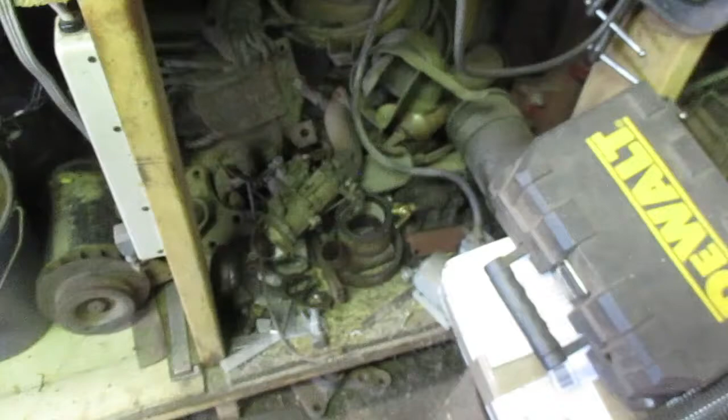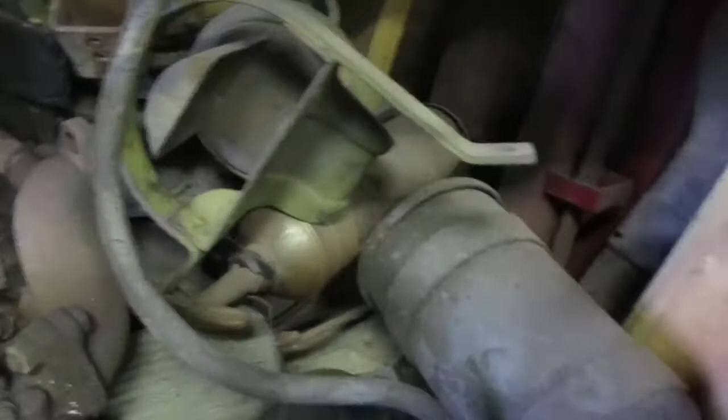It's hard to make out what all this junk is. I love it. I call it rusty gold. Unobtainium. I'm going to have to polish that fire extinguisher down under there. And that light, I'll turn the camera sideways. That light right there goes on the brush guard of the Chevy, but I don't know if I want to install it. And I'll explain why later.

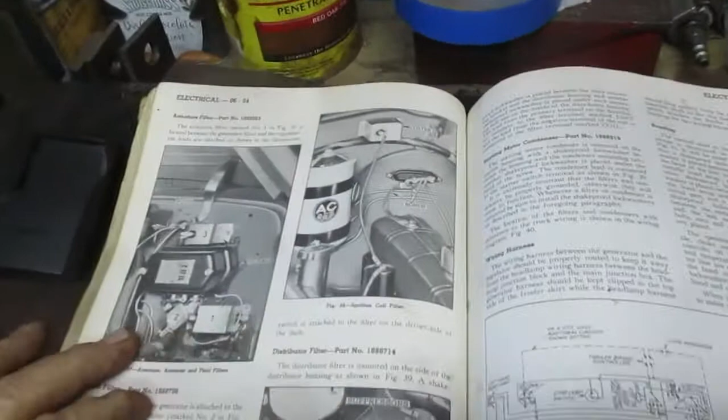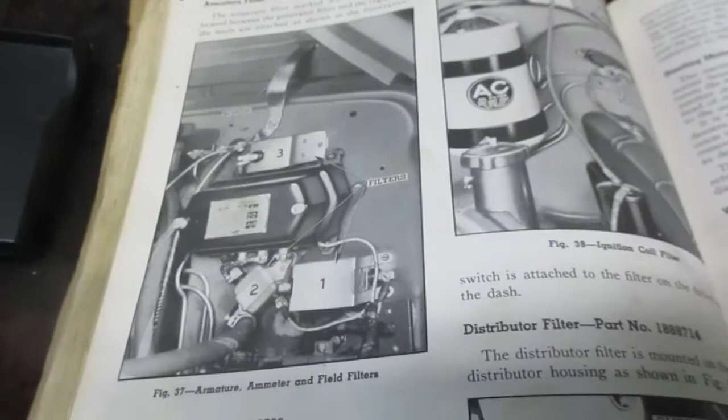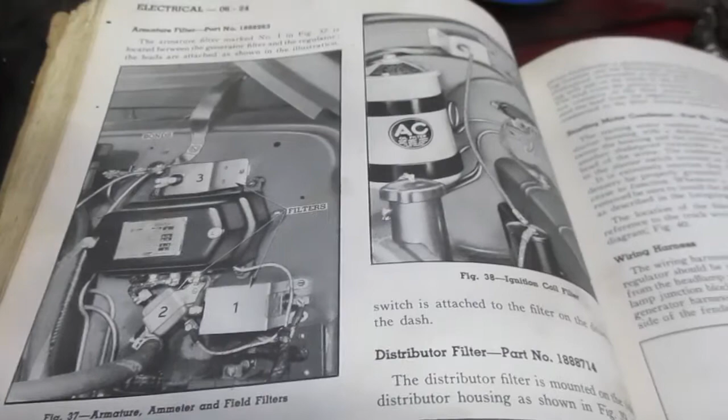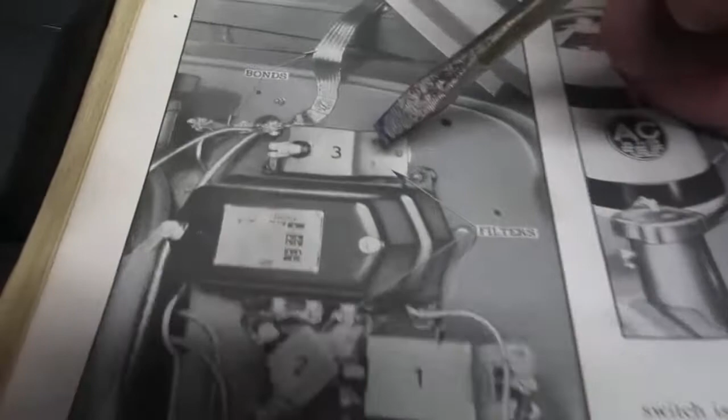Today's task at hand is installing the radio suppression filters as per TM10-1557. So my truck had some on it when I bought it, and I had to take them all off, of course, to clean the firewall. Let me find a pointer here. This screwdriver is nice. Okay, so I've installed this one and this one, but not this one. And I have installed this one.

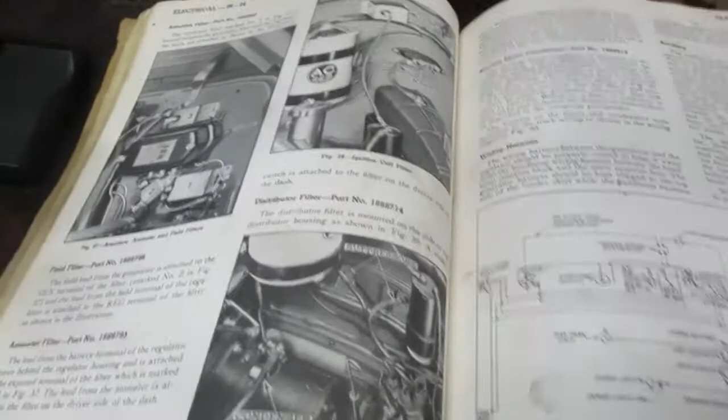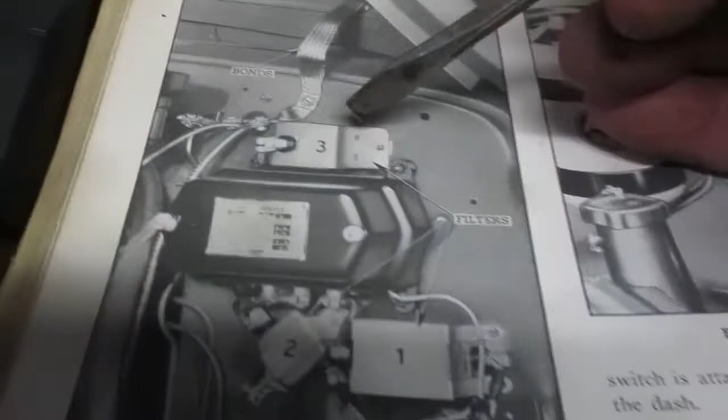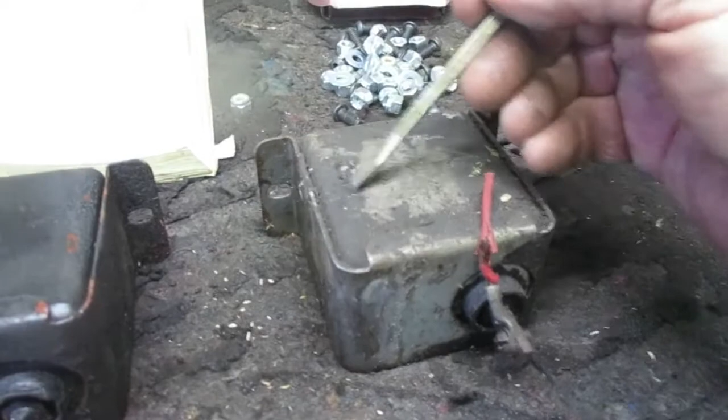Now, a lot of old guys will know when you turn on an AM radio in an old car, you start up the engine, you turn it on, you hear that buzzing sound. These filters cancel that buzzing sound. So this filter, number 3, I didn't know that I had. Not only did I not know I had it, but I have 2. I remember cleaning this one up a long time ago and painting it, but I forgot where this one came from, which is nice because it doesn't have much paint on it and it's really oily, so all of that stuff is going to clean right off with the wire wheel very easily.

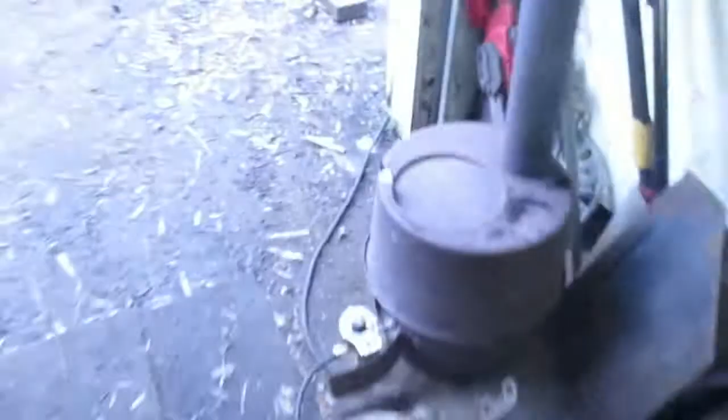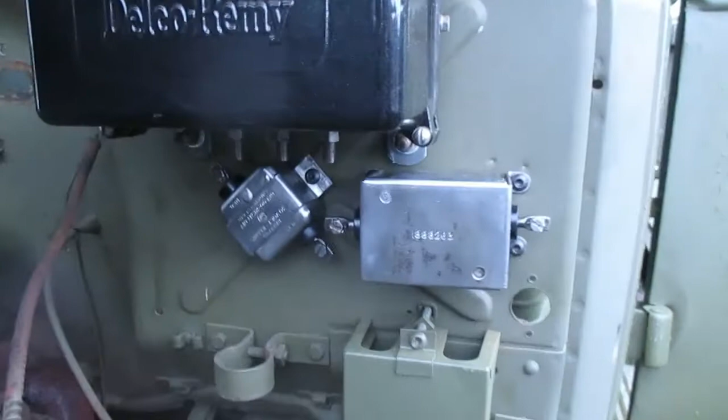So let's go to the truck and I'll show you what I've done so far. It's necessary to install these filters before the firewall goes in. And there are 2 of them right there. Originally from the factory, they were not painted. They were boxed up in cosmoline, which is a type of wax, and they were just zinc plated. I polished these up on my wire wheel, and the zinc is pretty good, but to keep them looking shiny like that, I put a real thin coating of motor oil with a paintbrush and then rubbed them with a rag.

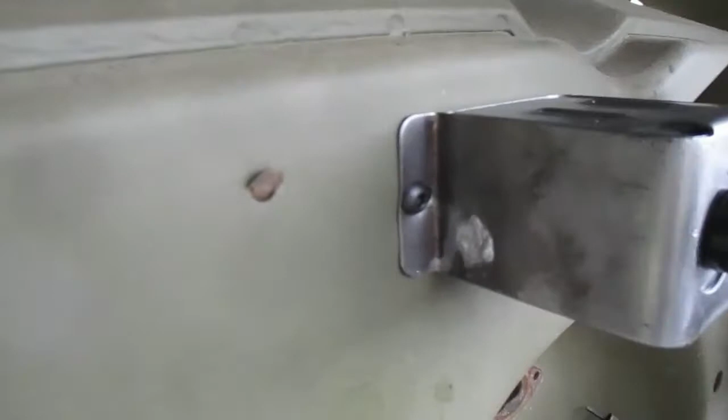So I don't have the correct fasteners, and that's kind of okay. I've used my quarter 20 Allen head machine screws. It's a little hard to see, but there they are. Those are also nylock nuts, so they won't back off. We'll go around to the other side. I used my impact driver, I wonder what I did with it. It's probably on the bench inside. Just used the impact with a deep 7/16 inch socket,

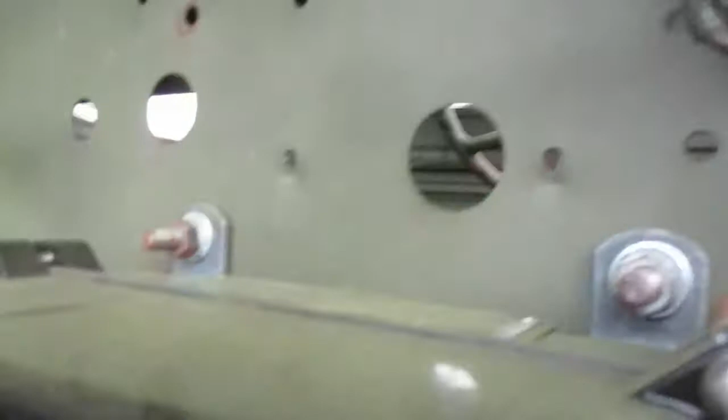and then I used my Allen wrench in the head and positioned it so that when the tension of the nut started bearing down on the screw, the Allen wrench would hold against something and stay put, and it did on all of them so far. This other filter I'm going to clean up installs in this area here.

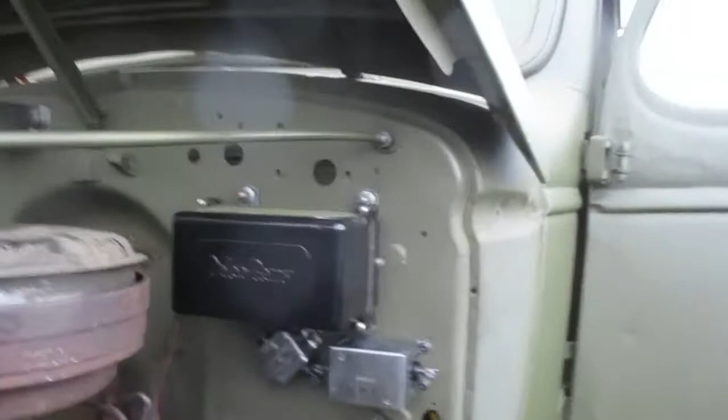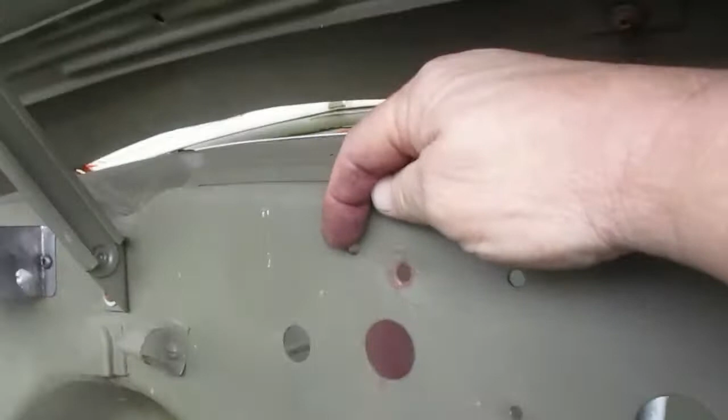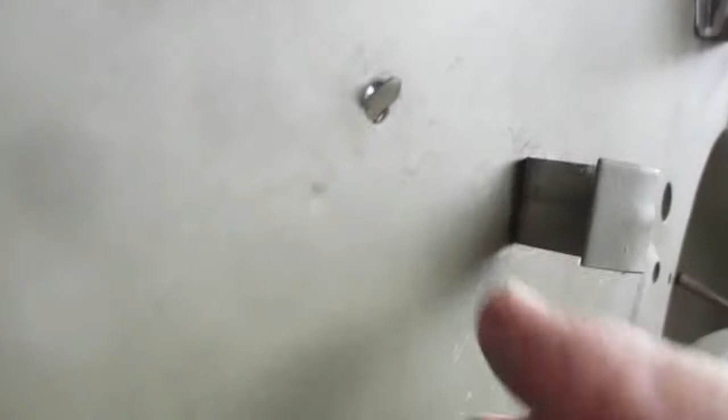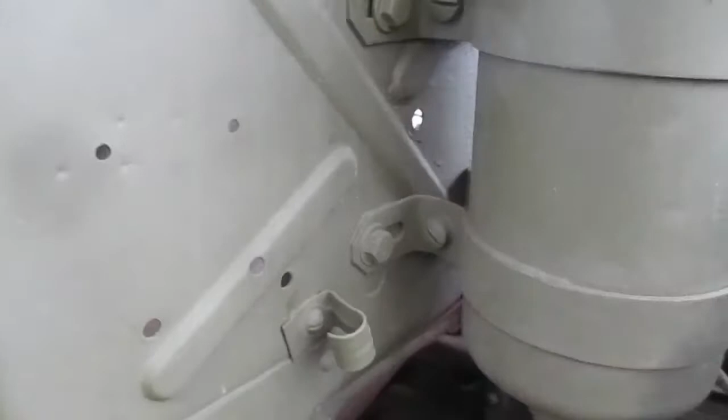When I had my first Chevy, I didn't know what all these holes were. I have since learned, and it makes sense, these holes here are for pins to go through to hold the firewall pad in place. In fact, there are still 2 here in the firewall. So I can find those, and I think another one goes here. These 2 holes here are for an oil can bracket, because there are points on the engine you've got to oil. I think some of these here were drilled in after the fact, and I'll probably just leave them alone.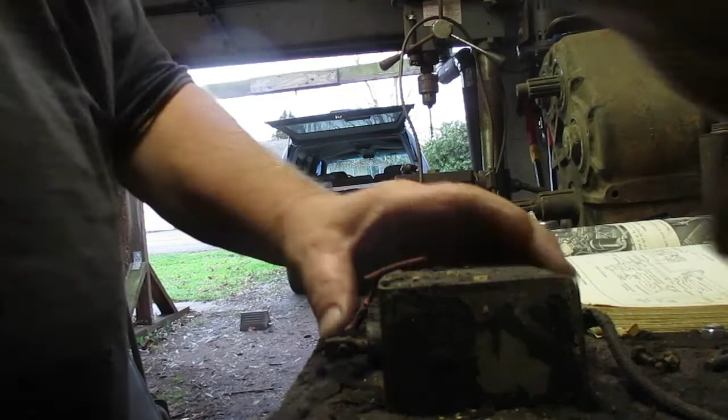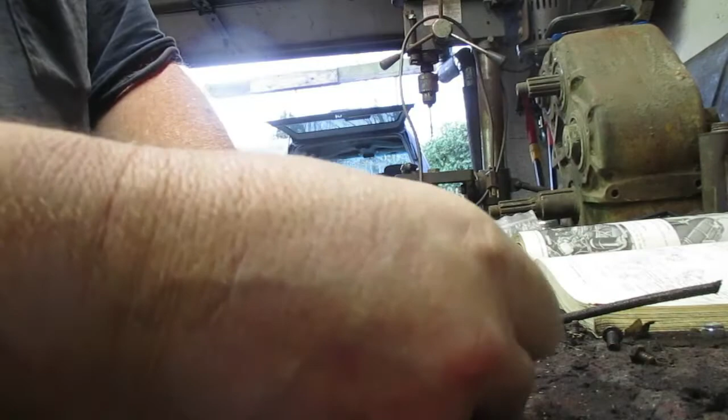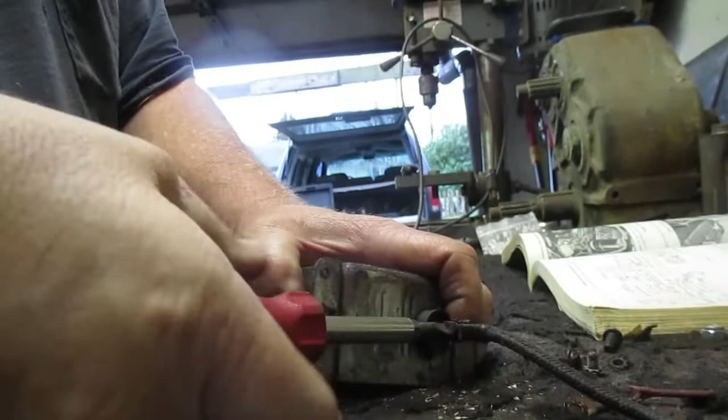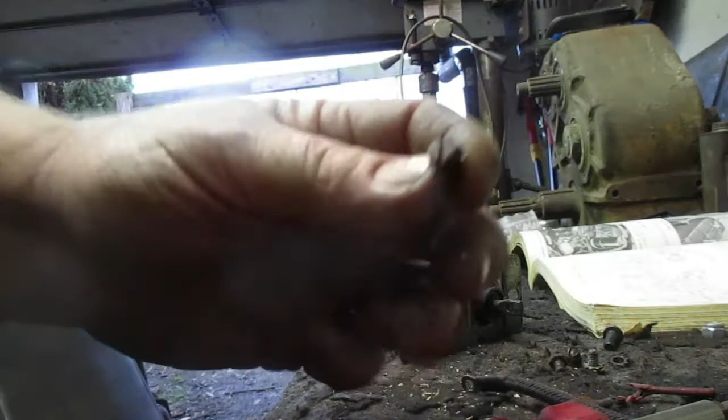But let's go clean up that filter. So I'm going to use this other filter, set you up right there. I'll remove the original wiring. These little fasteners can be cleaned up and reused, which is awesome.

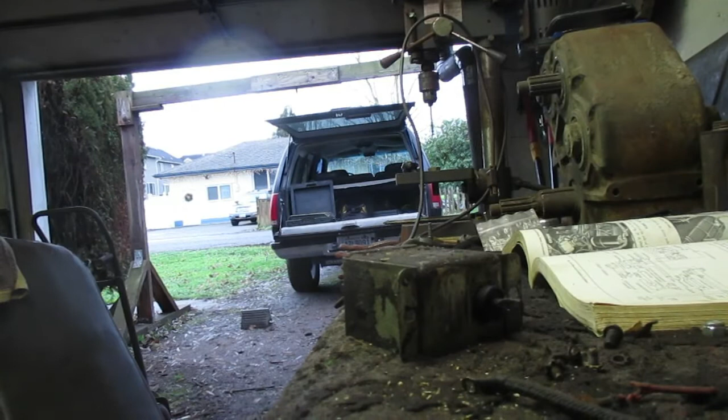I love it. I wonder... I don't know if I'll be able to set the camera down. I gotta get a tripod. Doggone it. This adventure is becoming a little bit more sophisticated as days go on.

So I'm just going to clean this up. I'll stop this portion of the video here, and it'll be edited into the next portion after it's cleaned, through the magic of stop motion. Well, maybe not stop motion, but anyway. Alright, so that only took a few minutes, maybe about 5 or 6. It had the moisture fungal protectant on it too, and a lot of grease. So now I'm just going to touch it up with this. Maybe this will be a better vantage point. Yeah, look at that. Resting it on top of the transfer case. All right.

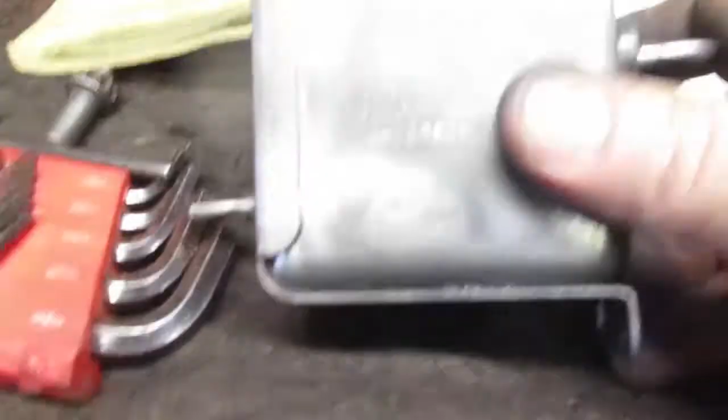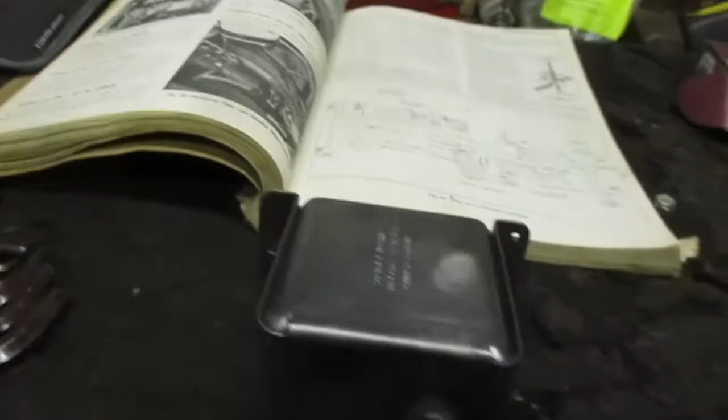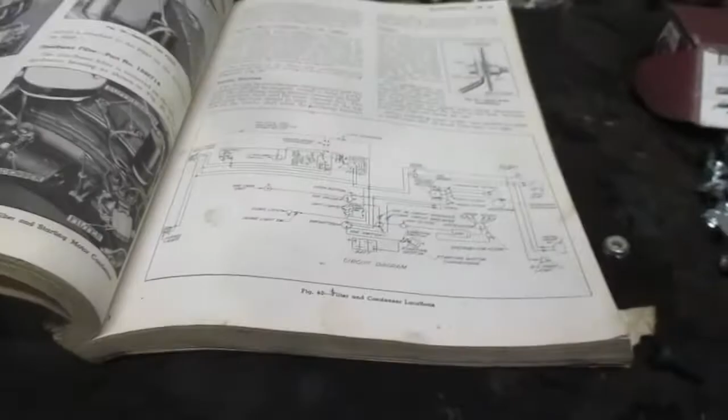Okay, finished. Nice and shiny. Oh, that was a bad glare, wasn't it? Wow, it still is. Okay. There. No fumbling. 30 volt, 10 amp, Delco Remy Division, Anderson, Indiana. So I don't know exactly what this filter is for, but as I go through the wiring schematic, I'll find out. So I'm going to cut it here, and that's how I clean up old components.

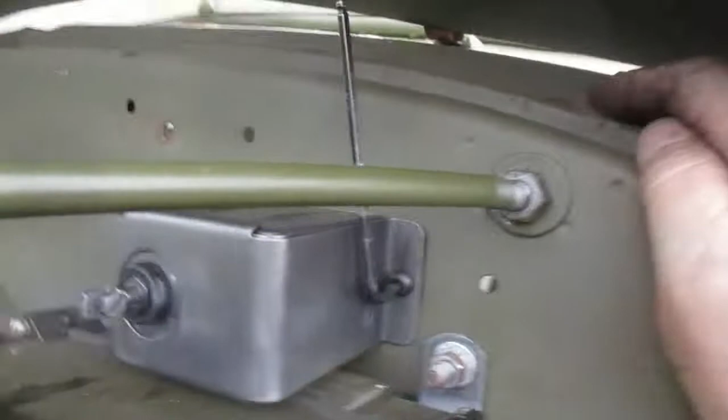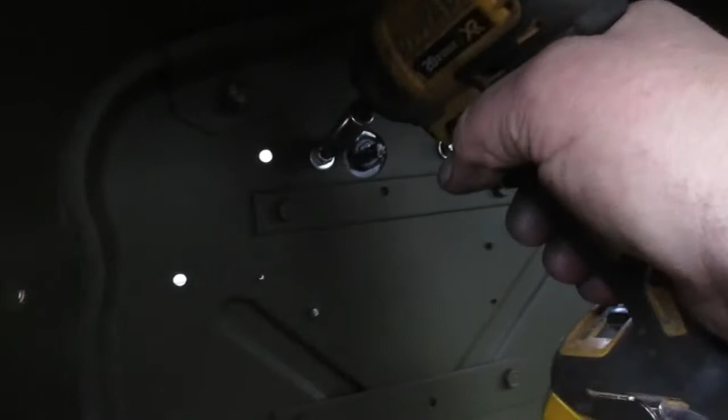Okay, so the filter I just cleaned up is on the firewall, and I have it set up to tighten the screws. The screw itself will want to turn counterclockwise in this position when I take the impact with the 7/16 deep socket and tighten it. Hopefully the Allen wrench won't fly off the screw head, which it did not. And that's all it takes.

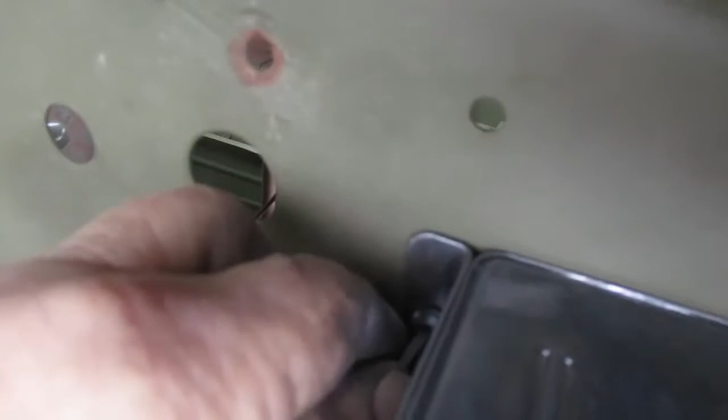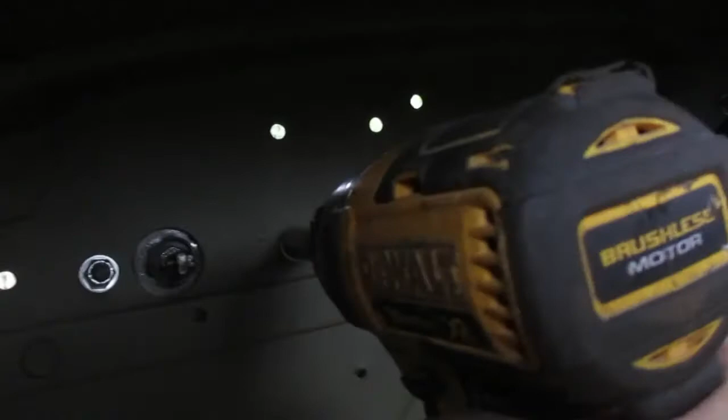So this time, on this side, let's see if I can see the screw head. Oh boy. There we go. So there it's resting there. We're going to hit it again. Careful. Okay, everybody steady. Here we go. That's it. That's how I did these.

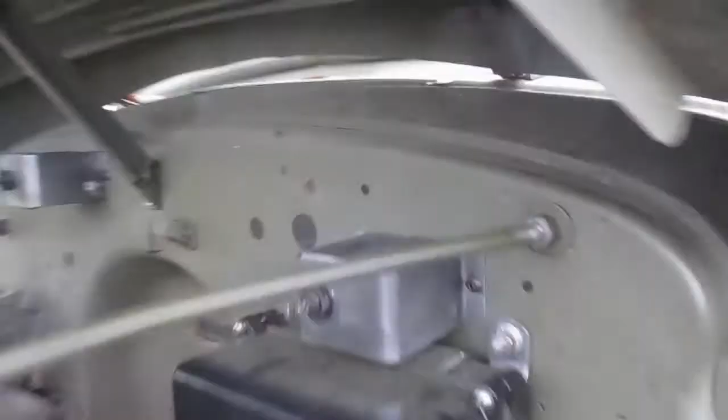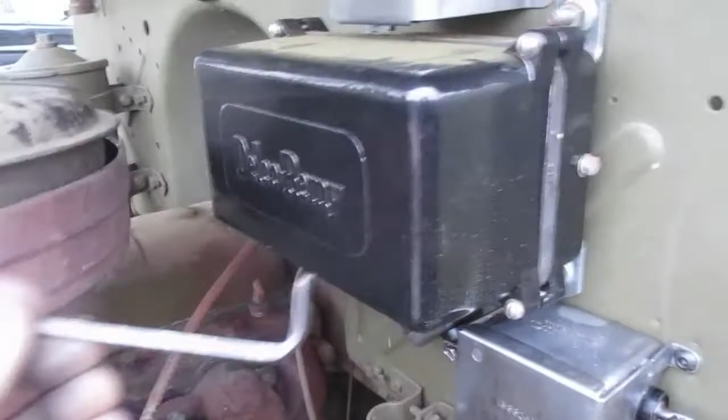And securely tightened. Got the Allen wrench, didn't fly off and land on the ground somewhere. And now all the filters are in place, all 4 of them. So that completes this portion of the video on the filter cleanup and installation.